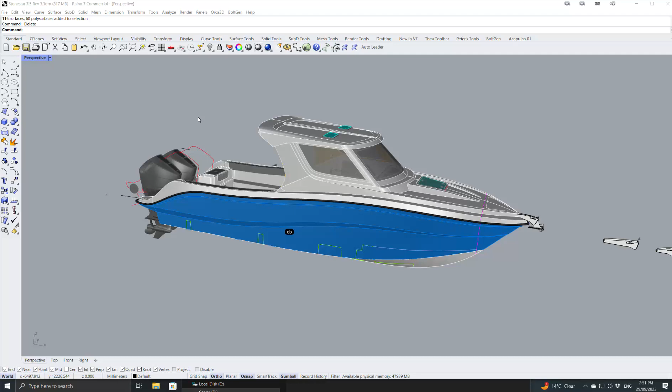There's been a lot of progress on this thing since my last video to you guys. It's going to look kind of similar, but I'm starting to sort out all the little nuts and bolts, or by that I mean all the small things.

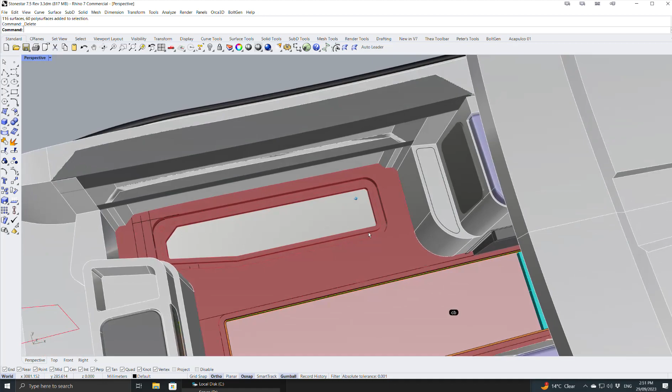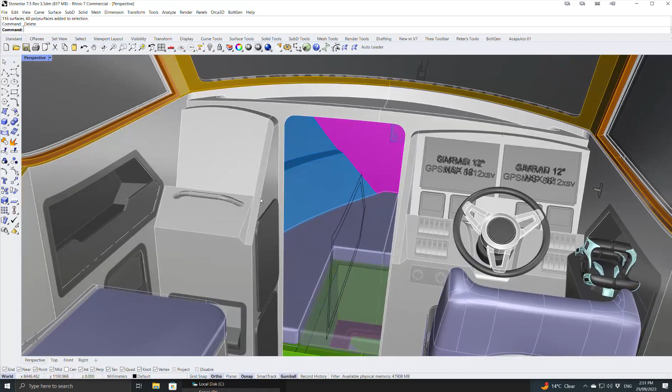So I've been sorting out access - where you're going to have your inspection ports and where you're going to have access. I've got a couple of big lockers back here, I just need to do some final foam calcs to work out how big they end up, but finished over here on the starboard side. So if I put a clipping plane in here, we can have a bit of a look.

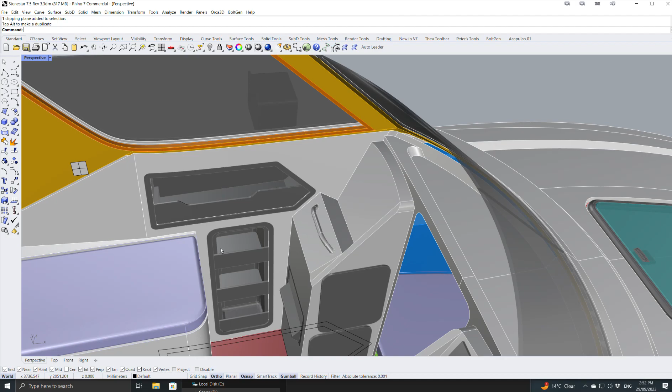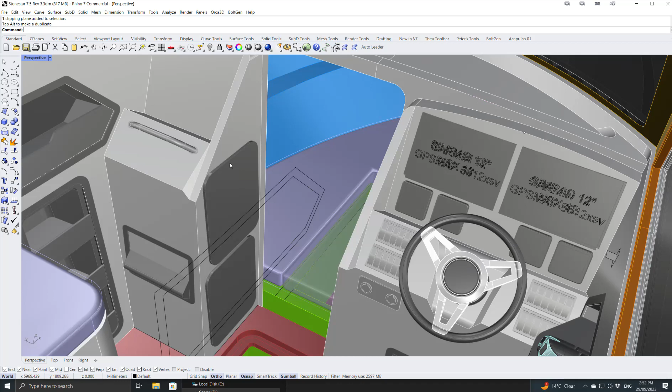So over here I've just got a knick-knack shelf, and then I've got a custom set of shelves over here. And then over here, this will be like the port side, that'll be a footrest for the passenger. And then there'll be a cutout here, or a glove box hatch or opening there if you want. And then down on this face here, I'm planning on putting in tackle stations.

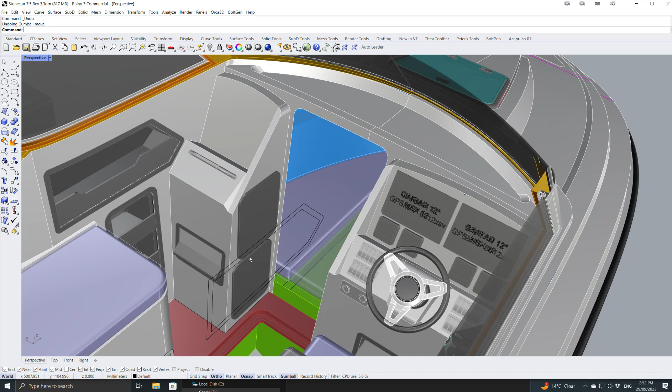So you have either a series of custom drawers, or you can buy these tackle station boxes that look a little bit like this - you open it up and there's drawers inside. So I'm just sort of working out what we're going to do there, whether it's custom drawers or something like that, or if I can find an off-the-shelf item.

These are quite expensive, they're sort of nearly $400 each. So maybe manufacturing in China or supplies in China, you might find something cheaper. But the plan is this will be a full tackle station down over here.

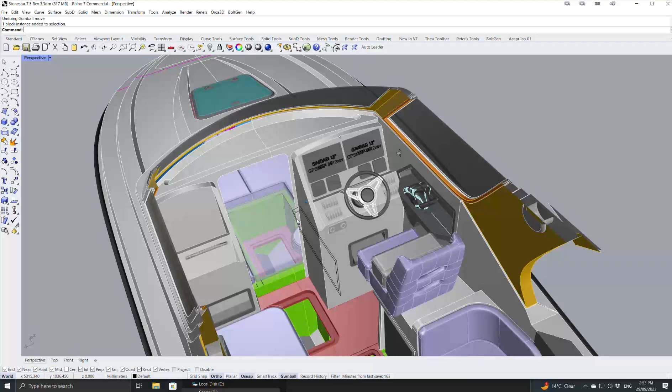And then I've worked on the dash a little bit more as well, so we've defined where the binnacle is going to go and what that geometry there is going to look like.

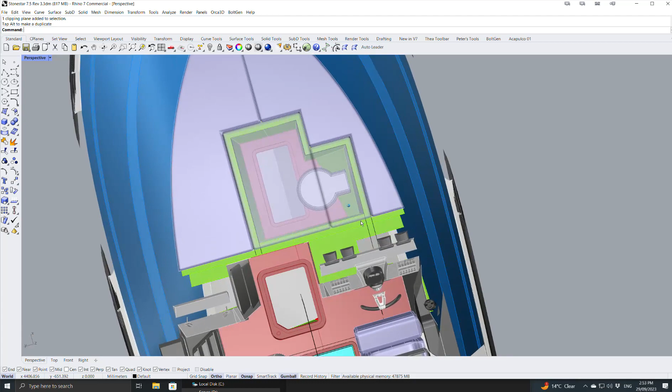I've been working up the front here today. So we've got the toilet that sits over here on the starboard side now, and a recess there, and then you can see the upholstery or the cushions, and then these ones over here that are transparent, they get removed so you can access down in there. So we've got another access locker that I've got up here as well.

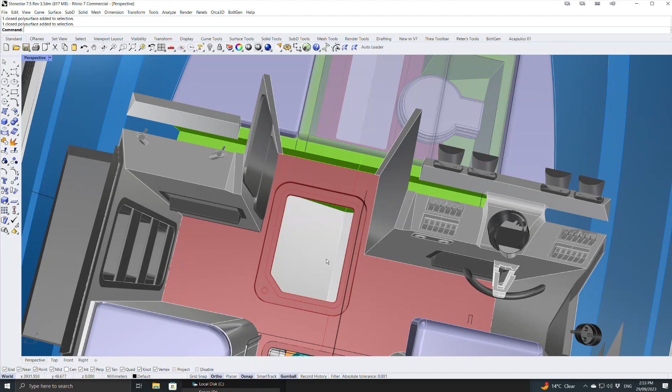So this is drained with a gutter. And then what will happen - if I put another clipping plane here...

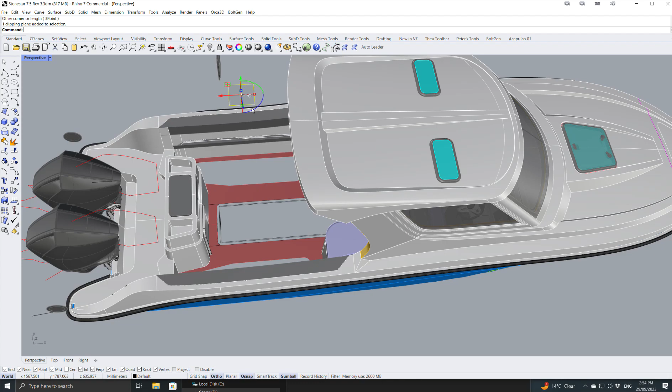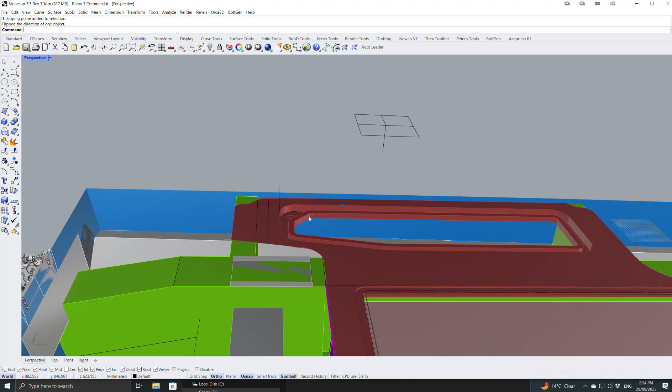So we've got an access hatch there, another one there, access and storage there, and then these two long ones here. So they will have drains and hatches with gutters as well. And then this one here is actually going to double as the cockpit drain as well, so we don't have to have a separate cockpit drain.

I've finalised the fuel tank, so the fuel tank sits there, and then that's a water tank that sits in front of there as well, a 60-litre water tank.

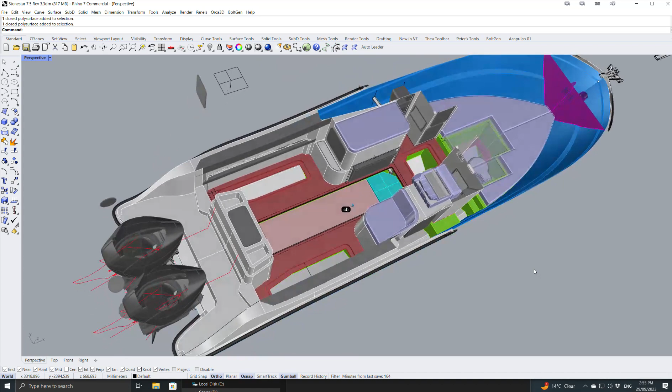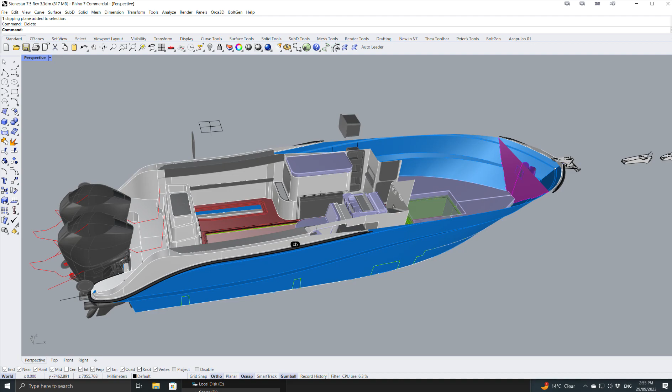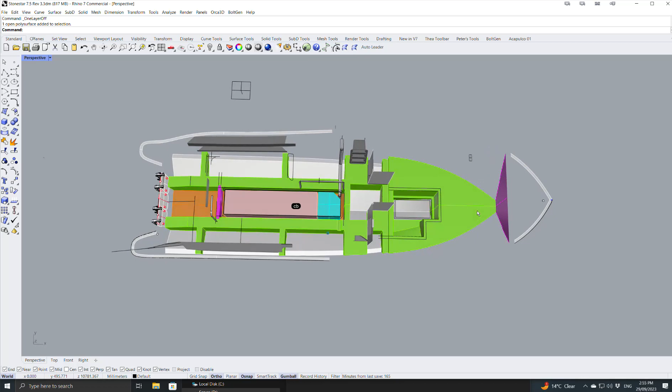And if I do another clipping plane - actually no, let's not do that. Let's turn off some things here so you can see. So all this green structure here has all been revised now, so that works in well with all the deck above. So we've got two big longitudinal stringers there, and then as before there's a flooding keel there to give you extra stability at rest.

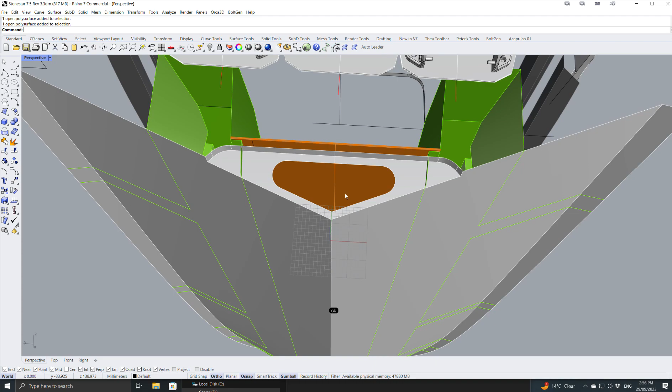And I'm going to see if I can work out a way to lock that water in there, then you can use that while you're going along as well, to give you a little bit of extra weight.

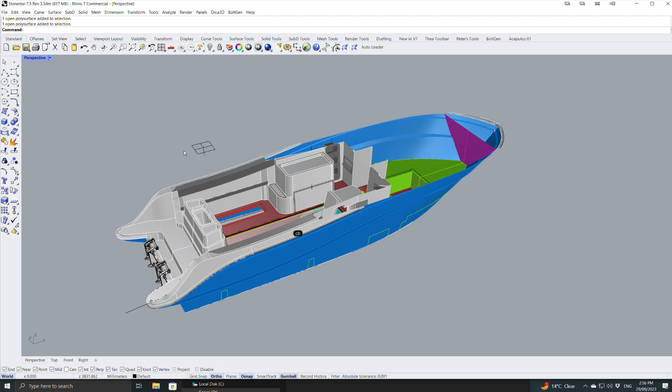Let me just turn on some things here. Equipment back on again. This, that won't be up there, that'll be up over there somewhere.

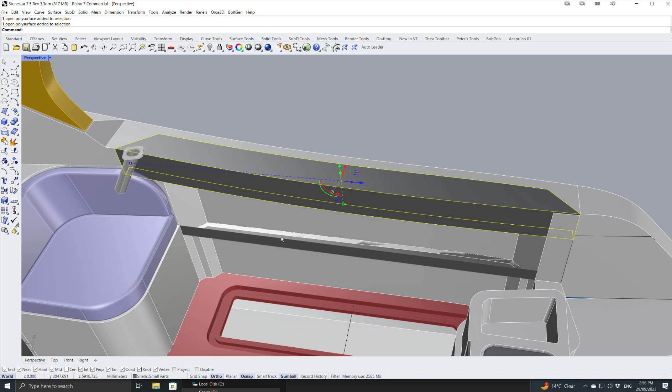We've got some shelves that sit in here now, and then so these are all small part molds, all these sort of dark grey parts here, and then that'll have some upholstery on the front, so it's comfortable when you lean against it. And next I've got to work out this door here to access all this area up inside here. But it's all coming together pretty nicely there, I think.

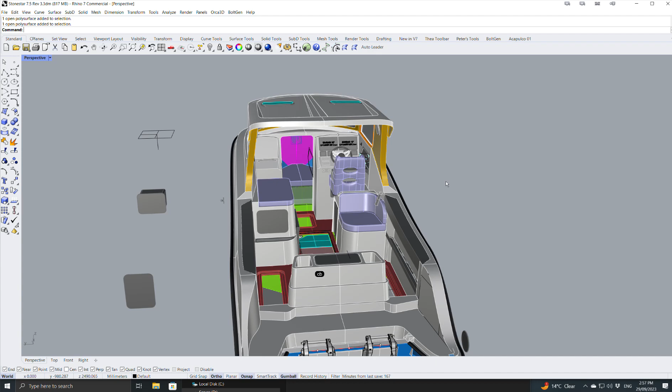So I've also been working out some of the weights and some of the Australian AS 1799 design standards, to make sure that this vessel complies with that. So yeah, lots of calculations and lots of little features being added to this boat, and I'll keep you updated as I go along with the progress.